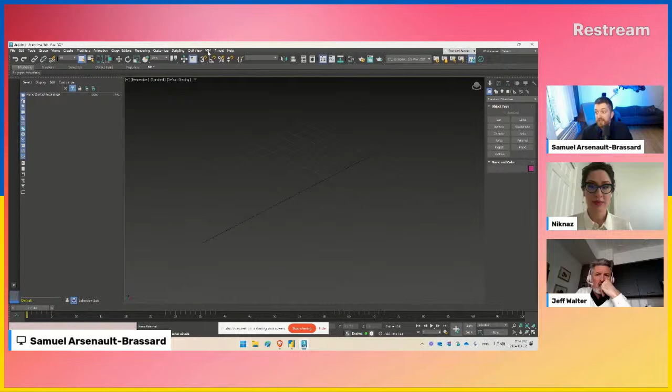One of our latest things that we've released a bit more, taken out of the closet, is the 3ds Max integration. So if you're going into Unity or Unreal, I actually tried importing the same model from an FBX from Revit, and it took about 3 hours and 15 minutes. If I import this as a Vim file instead, it takes more like 20 seconds.

As you see, I can decide if I want to split it by model, category, materials, things like that. But most visualizers will choose material, so then it's quite easy to override.

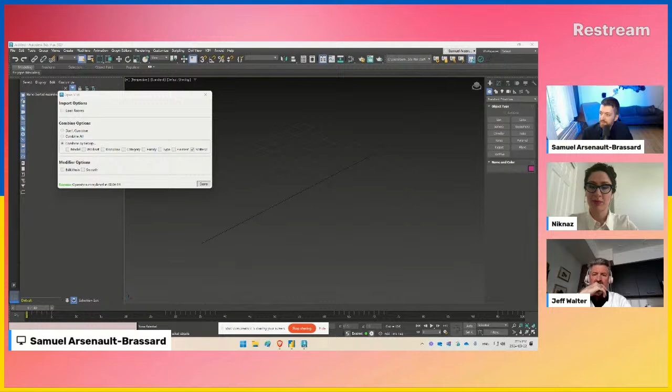Maybe I'll take a step back and talk about our geometry optimization. As part of the obsession I've hinted at earlier, we've been really obsessed with optimizing the geometry of Revit.

One second, sure, take your time. Oops, can't find it. Desktop, here we go.

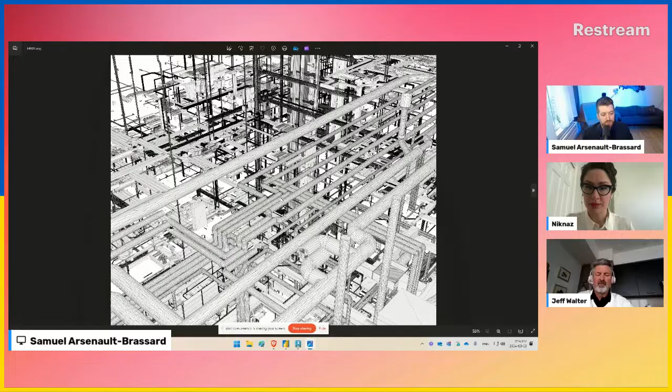So this is the geometry you would get from an FBX exported from Revit. It's kind of the worst case scenario, to be honest. A straight pipe will have hundreds or thousands of triangles, and normally what you do is optimize this bad geometry and try to improve it.

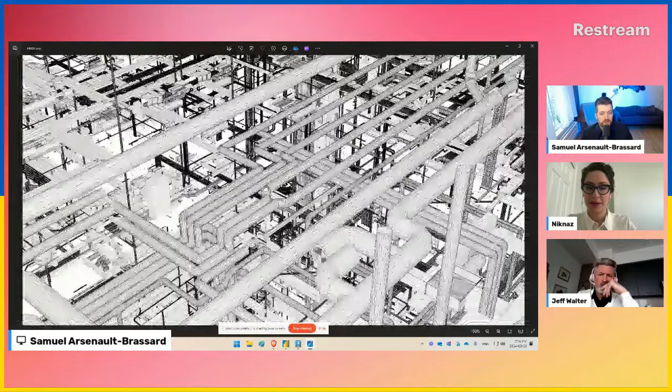In our case, we completely ignore it and just do our own geometry from scratch from Revit, which means you can normally get about a third to a half of the number of triangles. So that entire process I talked about is much more optimized.

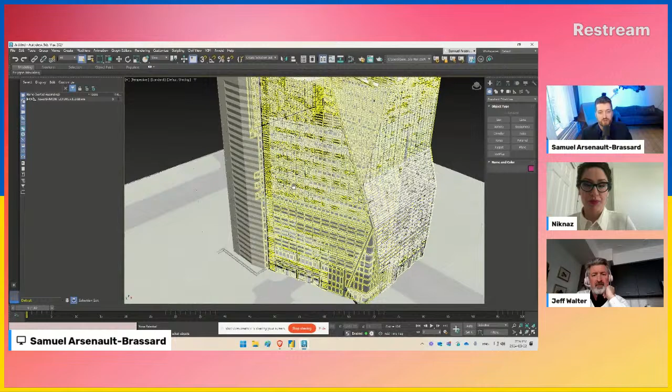And then you can actually move the model around in here. It's actually workable. And if you have some screws or something ridiculous, you can still go in here. So that's just our 3ds Max integration.

But those benefits, what we've really been doing over the last years is integrating all of that into Power BI. This is what Jeff was referring to. And Power BI is kind of a new concept, right?

It's business intelligence, first off. It's also the star product of Microsoft, and it allows you to link data from anywhere, whether it's your database, an Excel sheet, a CSV file, a website. So the limit is quite large, there's not really necessarily any limit. And what else about it, right? It allows you to marry an unlimited amount of data.

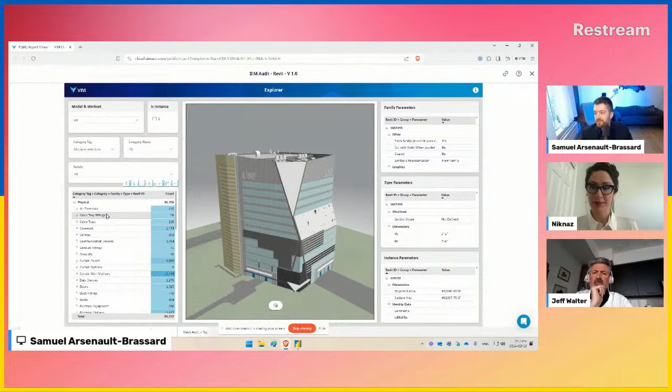We're talking about big data compared to Excel, for example. And then the biggest thing too is really sharing that data as an interactive online report. So instead of saying open up this Revit file, this is something that can be shared with anyone.

Classic live demo problems. So this is something that can be shared with anyone and is interactive. You don't need to install Revit, you don't need a good computer, you just need access to the web. And unlike a PDF, it's something where you can click on it and start accessing it.

And even we'll probably talk about it later with Power Apps, you can start writing back to the data instead of just consuming it in many different ways. So this is really a new world. I'd say it's a bit like the transition from AutoCAD to Revit.

Remember 10, 12 years ago, we're like, oh, why would I do Revit? Why would I do BIM, right? I can handle these lines, everybody knows how to work with these lines. Why would I go from Excel to Power BI? Why do I even need this?

And I guess the other thing about Power BI is that you're kind of given the powers of a developer, right? You're given that power without having to learn how to code. If you want a button, if you want something to be different, you just drag and drop it, and then it goes into this interactive dashboard.

So I'll take a step back here so we have a little bit of context, and I'm sure I'll dive right more into more reports in a couple minutes.

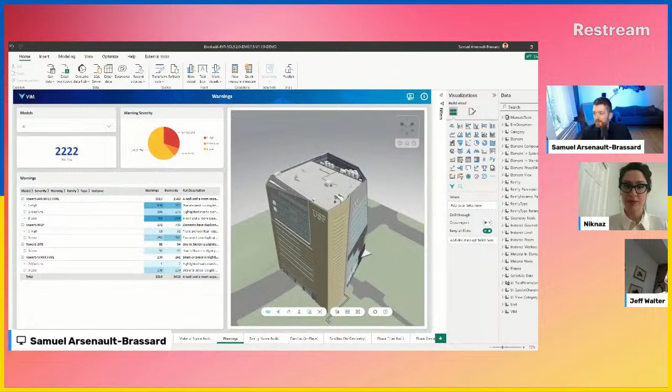So that exploitation, you hinted at Power Apps and Power Automate—let's clarify what that is for a second. Power Apps is something where you could select an item in the model and say, this is due for inspection, or there's an RFI here, or I have a question about this, or this failed the inspection, and it would just go on the list of things that failed inspection. The Power Automate thing is more like automating, reacting to the data.

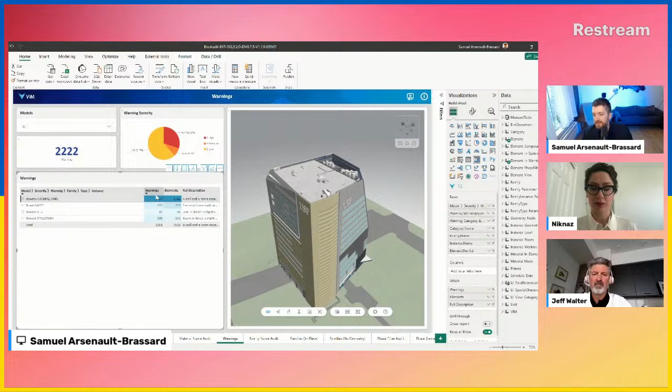So let's say you have this model here and it gets updated every day or once a week, and you're keeping an eye on the number of warnings in the model. Here we see the architecture model has 1,600 warnings, or if we click on just the critical warnings, we see it has 665 warnings.

Power Automate can react to things, whether it's IoT, like hey, it's too hot in here, or hey, there's a security breach. In this case, it could say you've got over 500 critical warnings, and then send an email, a Teams message, a Slack message, whatever it needs to be to say you got 500 critical warnings, you may want to check this out.

So there's that aspect. And if we go back and push a little more on the concept of digital twin, there's multiple people in the construction, right? The designers, the contractors, and then the owners. And the owners are a bit laggards when it comes to BIM understanding.

They go, well, I'm paying for PDFs, I don't care how you get it built. Or they say, just do the BIM, and I'm going to do the minimum bid contract. So do the BIM, and give me the model. But they're not saying it's not acceptable to have any duct in a structural item, or that you need carbon data for every single item, warranty data for the items, and so on.

So I think that's really the most exciting part for me, because once the owner starts driving the BIM rules for their own purposes, or even more...

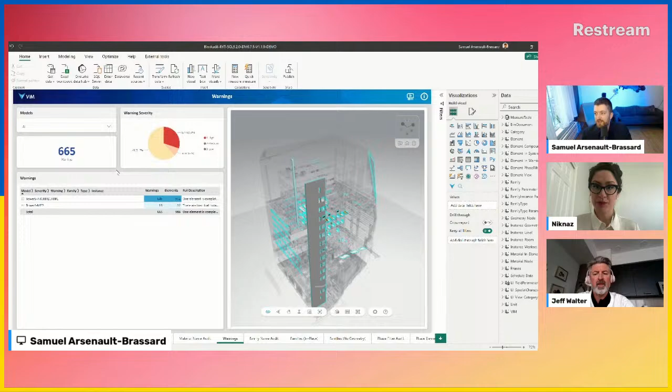So from a building owner's perspective, the idea of using Power BI to manage, exploit, and understand their data, to prove the carbon footprint, prove things to the government or the insurance company, or when they sell the building and say here, I've got a great BIM model - that's going to have huge value, especially as we start demanding proof of carbon usage or IoT usage for electricity or water. That to me is the most exciting part of the digital twin.

I'll plug the subcommittee that I sit on, the National Institute of Building Sciences, NIBS, who I think are preparing documentation that is standardization of BIM to digital twin. So when you talk about where that's going in terms of standardization across the life cycle of these models, certainly we're talking about that BIM to digital twin kind of interface and standardizing, and having the ability to audit and manage information.

Like you said, across that whole need and requirements, because you definitely mentioned 6 or 7 different data needs that could potentially start filling in, and that's just going to keep expanding as these concepts grow.

And then the second point I wanted to address, which you also touched on, was scalability - talking about programs, talking about portfolios. And the last point I had on my slide, which I won't bring up but I'll talk through, was really looking at the futures of cities and the future of communities and neighborhoods, and being able to organize and creatively plan, and become more predictive and less reactive to fundamental things.

As these tools build up at the project level and roll up, giving different value propositions, it eventually rolls up to the city level. AECOM is well known for guiding some of the large future city programs around the world. One thing we're thinking about is what designers do at the very beginning that can enable those long-term outcomes—we're even talking about AI cities and AI city operational systems. So really bridging the gap between what happens early and what happens in those future outcomes. Scale is an important element to that for sure.

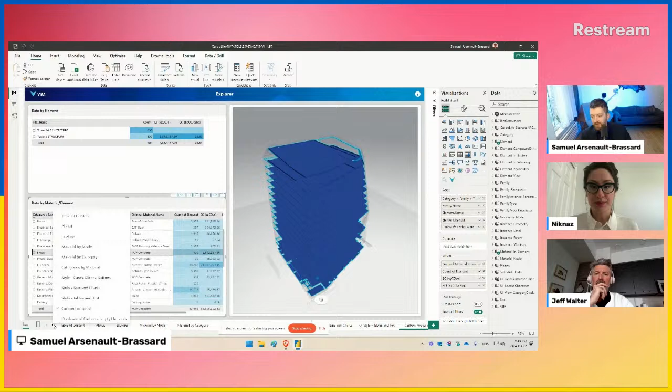I've written a fair share of BIM execution plans, and I kind of know what everybody wants in that sense. Well, not everybody, but the general things about it.

So here's, for example, a parameter checking tool. It shows you the parameter - it says this parameter here is 68% filled. And then when you click on it, you see which elements have it. So we see, for example, the poke-through boxes don't have any value for it. You see the values that are being used, so you kind of wonder, why are we using WL and numbers? Is this WL an error, or is this normal? It's really good for that.

We can say show me all the parameters, show me all the ones that are partially filled, show me all the ones that are filled or empty. But the reality is some parameters are more important than others - these are the BOMA parameters for our project, these are the mandatory parameters for our project. So in this case, it would be as simple as making an Excel sheet of all the mandatory parameters, ideally a list of the shared GUIDs, plugging it in. And now you'd add a little checkbox, and say all parameters versus mandatory parameters - then you're looking at only the 50 parameters you care about rather than 2,000 parameters of different levels of importance.

Another thing I'll be working on is how do we check in a standard manner Workset rules, right? I don't necessarily want 100 different ways of letting the offices figure them out for themselves. I want to create a best practice way where we figure out how to write those rules in an Excel sheet. There's 2 ways I think of it right now - this Workset can only accept these categories, and maybe you can even go down to the actual family name or a parameter in the family. But I'm going to start with: this Workset can only have these families, or is forbidden from having these types of categories, and vice versa - these categories or families can only be on these approved Worksets or are forbidden to go on these Worksets. So that's a little bit of upcoming work.

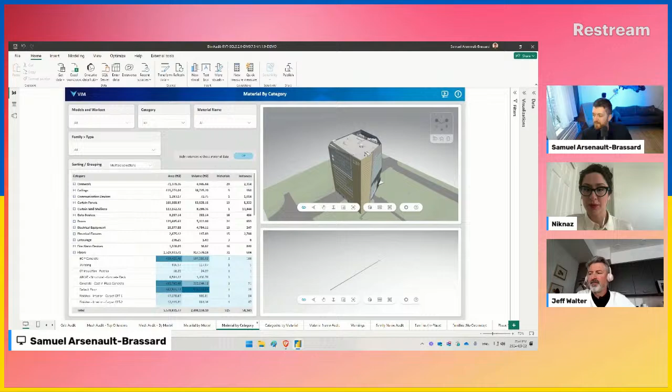So with that, I'm going to ask you my next question, Samuel and Jeff. What are some of the key focus areas and goals of BIM in utilizing BIM data visualization?

Oh, and then I was also going to ask, now that you're sharing—okay, you'll stop sharing. If you can share your screen again, if you can show us some of these new features you're planning to add in your next update.

So the features are not—well, I guess okay, I can show you more of... actually, am I sharing my screen? There we go. Yeah, so I can show you a little bit of what's coming for VIM Enterprise. What's in pink is really the ACC integration.

This part here is the desktop application. We had two things before: we had the cloud, which just goes on the cloud and that's it. But sometimes people have very needy security requirements, so at that point they need to go to enterprise, and that way they can put the server in whichever country, they can handle 100% of the server. We can also support secret projects, whether it's military or whatever, where it doesn't touch the internet and there's full-on security. Obviously at that point you're no longer on ACC, you're looking at local projects for Revit or local files for IFC.